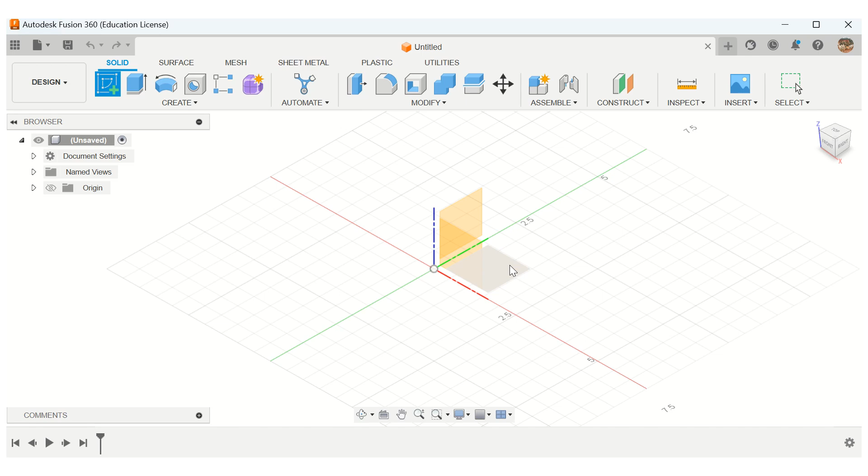Now, you do have some latitude in how you want to build your box. We have extra supplies in addition to the regular Automata kits, so I am not going to lock you down to the specific sizes of the pieces that we have. We've had people glue pieces together, and last year we had people saw pieces of it to get the design that they wanted. So I'm not going to hold you to that, but you do need to be intentional in your dimensioning.

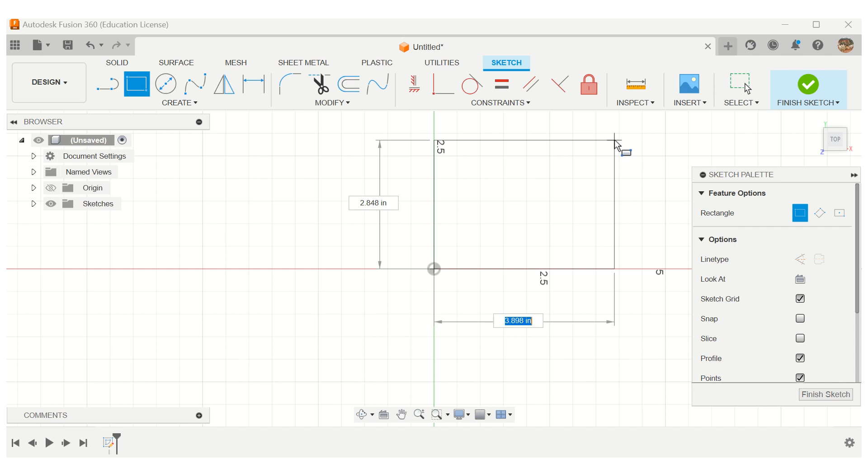So I'm going to go ahead and start by drawing a rectangle, and then I am going to dimension that rectangle. I am doing this without a mouse because my mouse is at work and I am not, so it might take me a little bit longer.

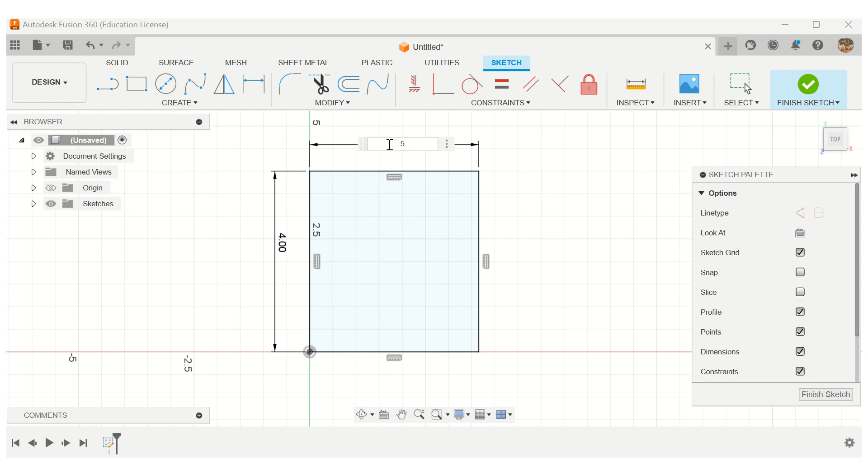The boxes that we have are, when you put them together, there's some overlap in the pieces, but they're about 4 inches by 5 inches by 4 inches, give or take some. So I'm going to make this 4 inches tall, and I'm going to make this 5 inches wide. It's not exactly that, and there's some flexibility with how you can actually put the pieces together.

Now I'm going to finish that sketch and then extrude this to 4 inches, and that's going to give me my basic box. Now, of course, the Automata box is hollow.

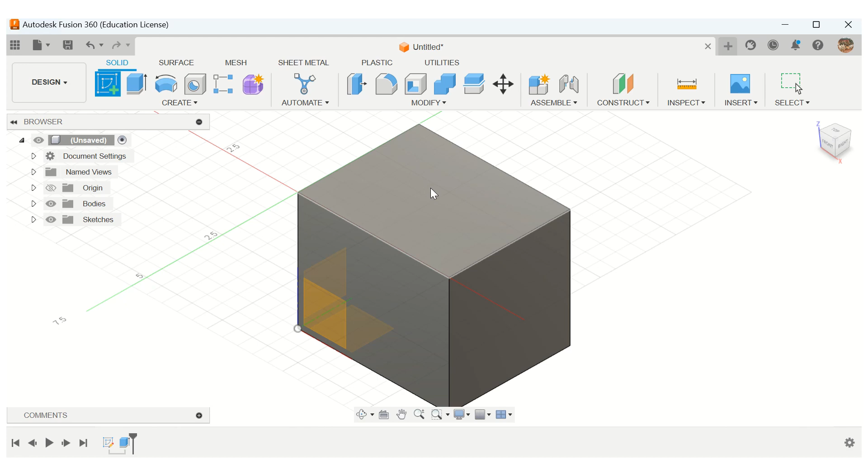So what I'm going to do is draw a sketch on this surface, which some of you have done while playing around with Fusion, and some of you have not done yet. When you go to create a sketch, you don't have to pick one of the 3 primary planes. We do to start, but once we have some planes in our design, we can draw on any of those planes. So what I'm going to do is pick this plane to draw on, and Fusion will rotate that around.

And I'm going to draw a rectangle inside. Now, here's one of the reasons why I wanted to do this particular video, to get the thicknesses correct on this. So the thicknesses of the little board pieces that we have are about 1/4 of an inch.

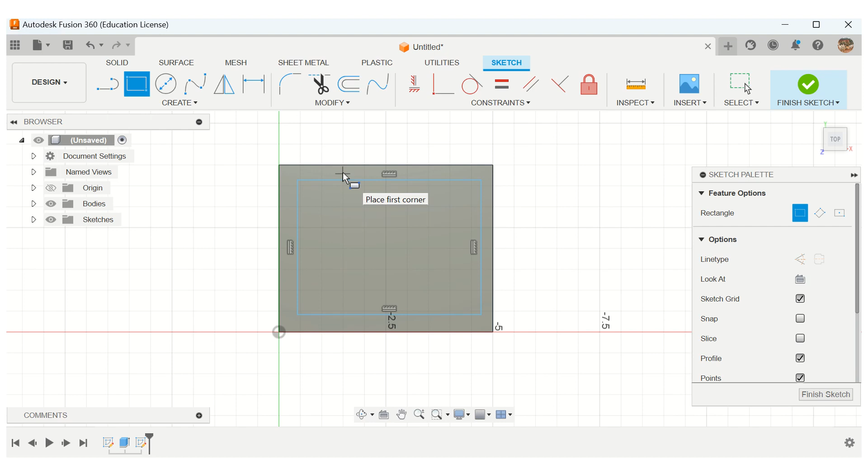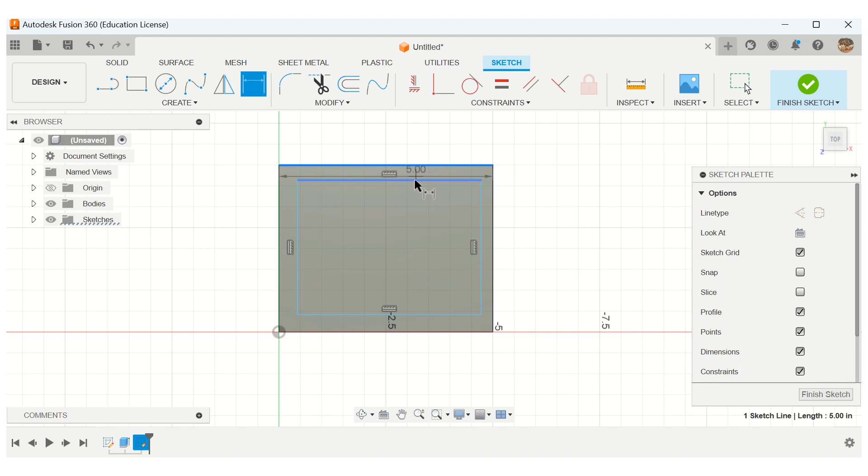So in order to dimension this, rather than dimension the rectangle and try to locate the center, I'm going to click on the top line there, and then this line right here, and dimension that to be 0.25 inches. Then I'm going to do the same thing all the way around. That's going to ensure that my cutout is what I want it to be.

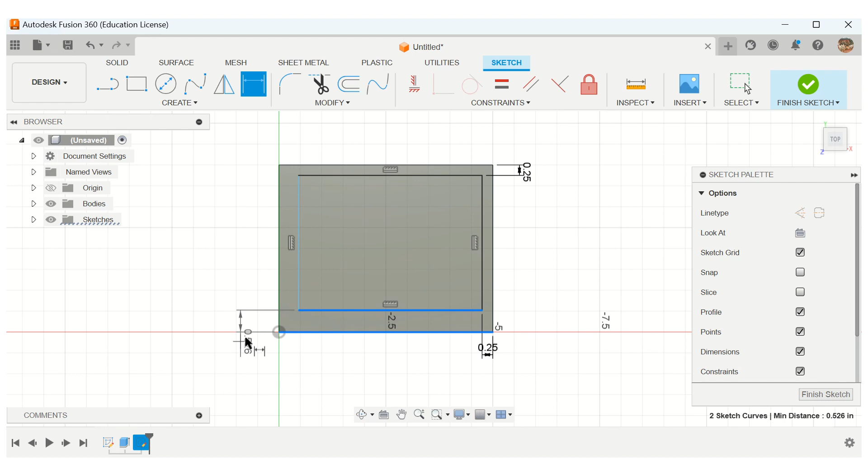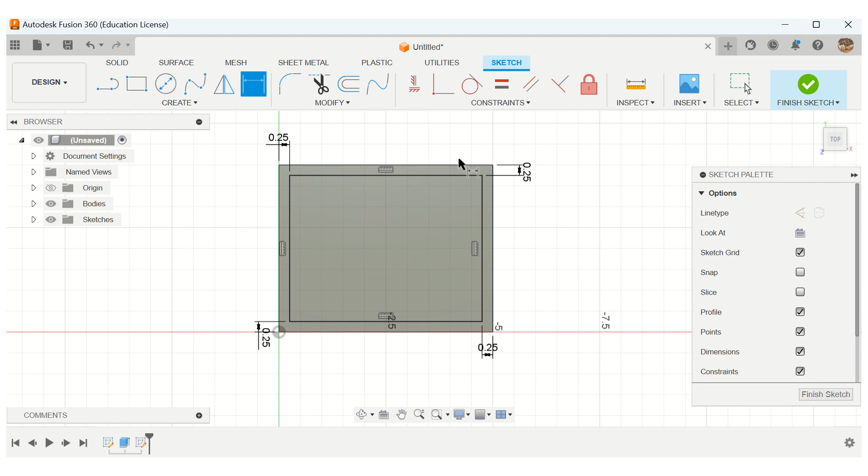Now there are other ways that you could do this. You could do a center rectangle and dimension the center from the edges, or dimension the actual rectangle itself, which I am not doing — you'll note that I'm not doing that. I'm just making sure that it is 1/4 of an inch away on every side, and then Fusion is adjusting the size of the rectangle.

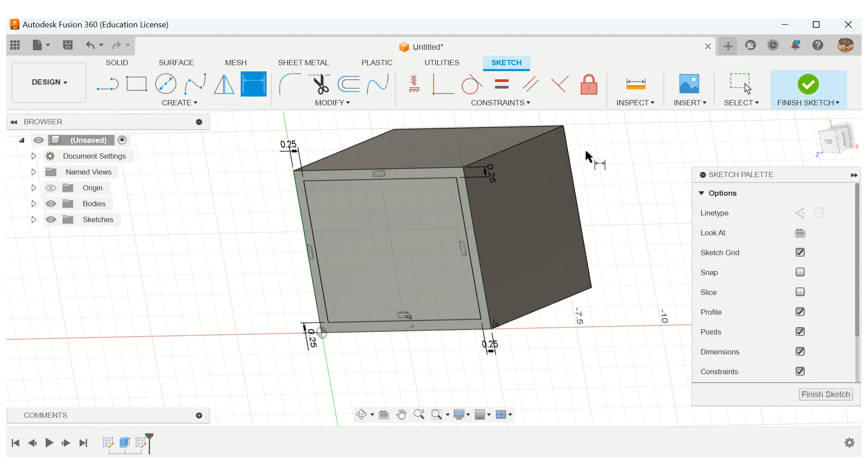So that way I'm completely sure that this perimeter I'm outlining is the size of the actual pieces that we have. Now what I'm going to do is a cut extrusion in, and if I turn this around, it is 4 inches deep. So if this back piece needs to be 1/4 of an inch thick, I'm going to extrude that 3.75 inches in.

So I'm going to go ahead and finish that sketch. Now what we have is this rectangle on this face, and I'm going to extrude that.

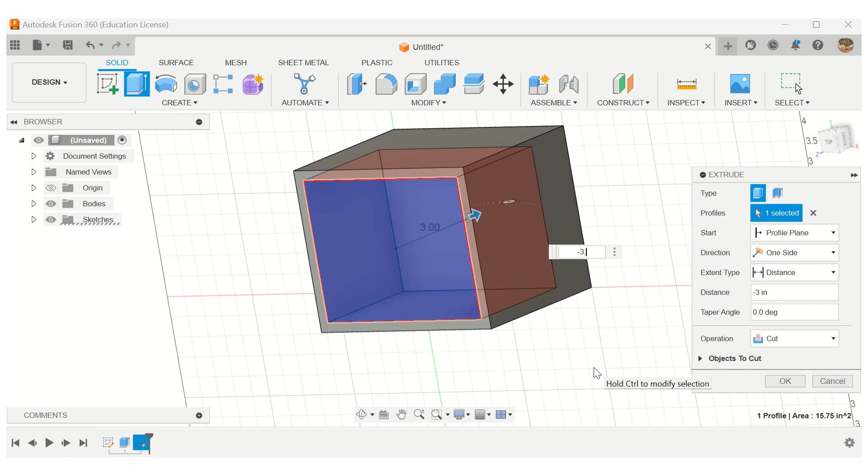Now I want to extrude in so that I'm cutting it in, but I want to make sure I have 1/4 of an inch left in the back. Notice that this is negative, so I want to make sure I'm doing a negative extrusion here. It just means I'm going in the other direction, and I want that to be 3.75. That will make sure the back here is the thickness I want it to be.

Okay, so there's my Automata box.

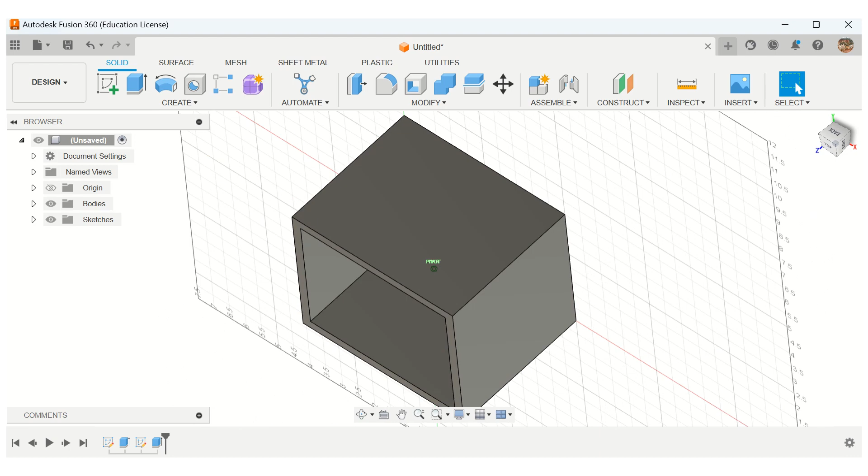Now I'm going to do a couple of things here geometry-wise, as well as introduce a couple of new skills. If I want the axle of my Automata to go straight through the center, which you probably do, because if you put it somewhere other than the center, you're going to have a lot of space on one side of your cam, which is what gives you the motion you want. But you'll run into the risk of the cam hitting the edge of the box in another direction. So what I'm going to do here is create a sketch on this side panel.

And then I'm going to use some geometry.

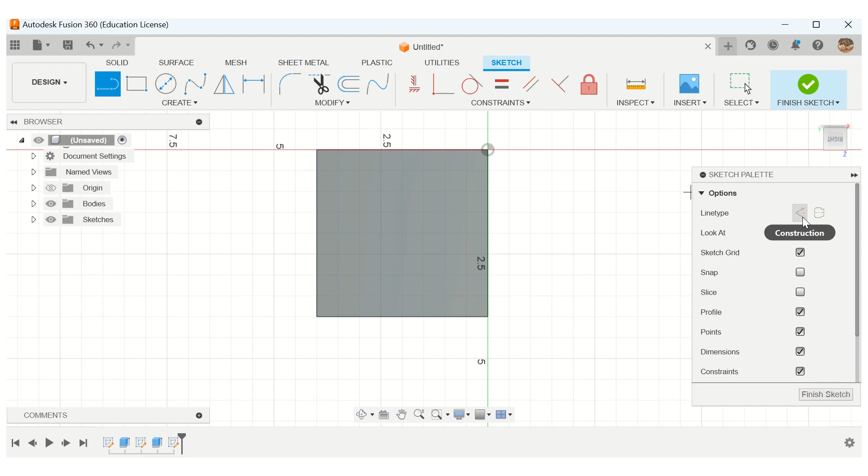So I am going to draw a line, and over here you'll notice it says line type, and there's an option for something called a construction line. We are going to cover construction lines in a future lesson, but if you can get it now, even better. This is a line that's not actually part of my drawing and sketch here, but that I am going to use. So what I'm going to do is come up here to this corner, and you'll notice that Fusion marks off that corner.

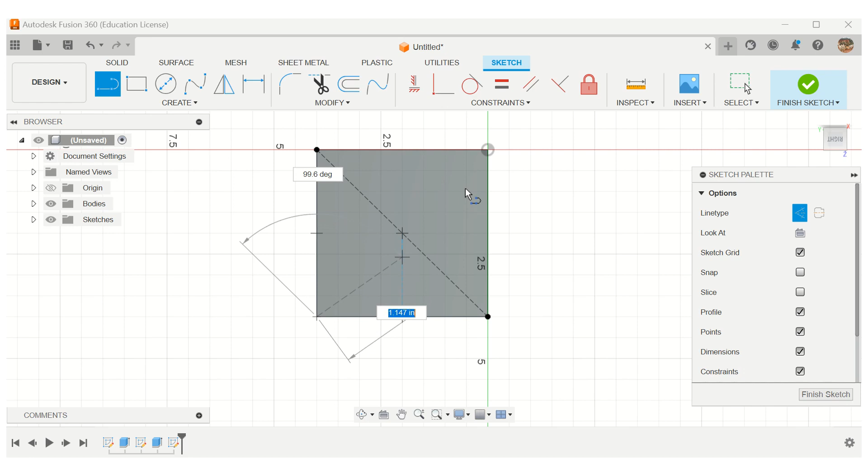I'm going to draw this line diagonally across, and you'll notice that it's dashed. That means I can see there's a line there, but Fusion is not going to recognize this line in terms of doing an extrusion or anything like that, because this is a construction line — it's intended to guide my design, but it's not necessarily part of the design. Now I am going to draw a construction line going across the other way.

And here's the geometry piece: if you have a rectangle and you want the center of the rectangle, the lines intersect at the center. So the midpoint of those lines is going to be the very center.

Now, something I always forget to do is turn off my construction line. I do it all the time — I'm sure you'll watch me do this in class, where I just keep on drawing, and then I'm like, oh, it's still in construction mode. It's super easy to change that. If you wanted to change it over, you could simply come over here to select, select the line, and then you have the option to change it from construction line to a regular line, or back to a construction line. So if you forget, it's not a big deal.

Now I am going to draw a circle, and make sure that circle is right in the center. When you do your actual automatas, this is the geometry you want to employ, because you're going to want to physically drill these holes in the center. Otherwise your axle is going to be off, and it's definitely not going to work right.

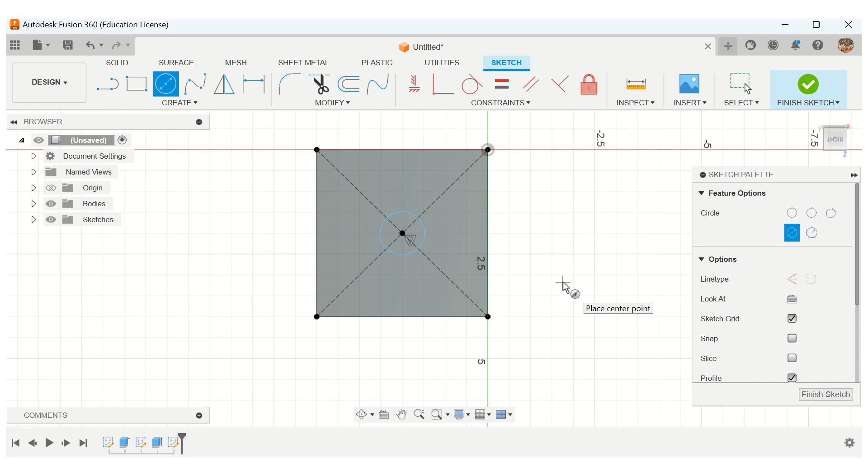And then for the dowel rods that we have — this could vary depending on what you have — but usually about 3/10 of an inch. If you use 1/4 of an inch, it's a little bit too small, so we're going to make that about 3/10 of an inch.

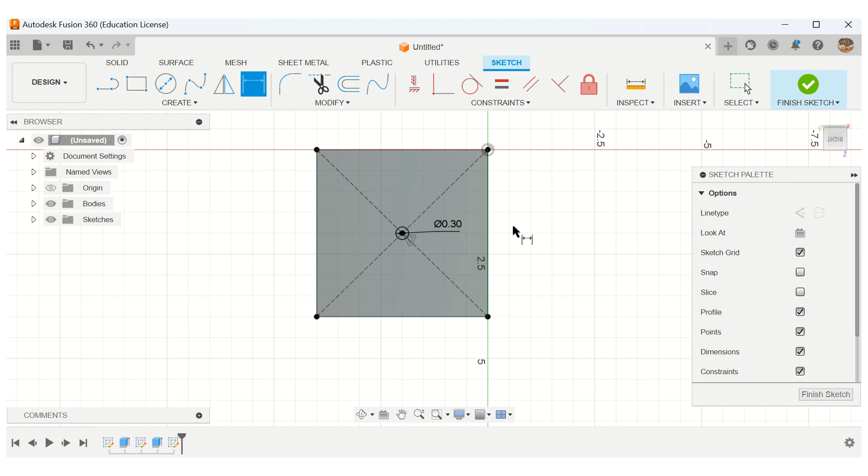And now I'm going to extrude that hole all the way through. Now, this is where I really, really wish I had a mouse.

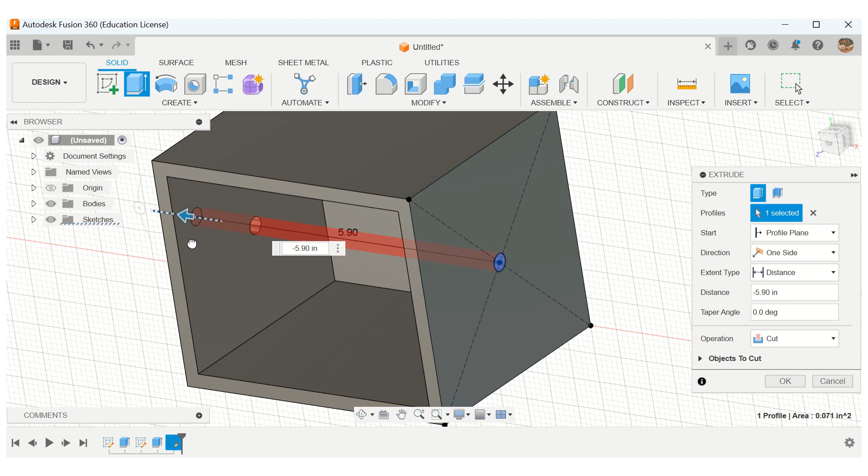I can zoom in if it's a little hard to see the piece—you'll notice what I just did, I zoomed in so I could see it better. And I'm going to take that hole and do a cut extrusion all the way through the other side, pulling it all the way through. It's only going to matter that you have it all the way through if you intend to design something else that goes out there, which we don't intend to do.

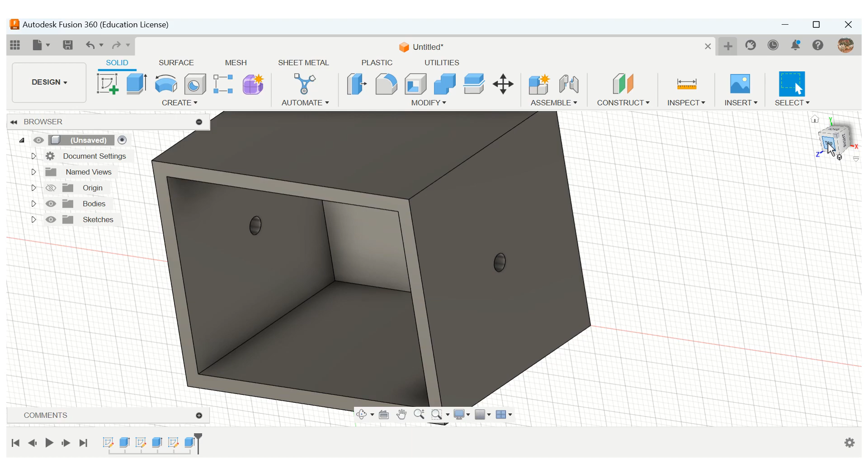You'll notice over here with the extrusion it says 'cut,' and that's just Fusion's way of telling us this is an extrusion that's cutting through the material we have. So now I have my holes, and they're beautifully lined up. There it is—you can see that goes all the way through.

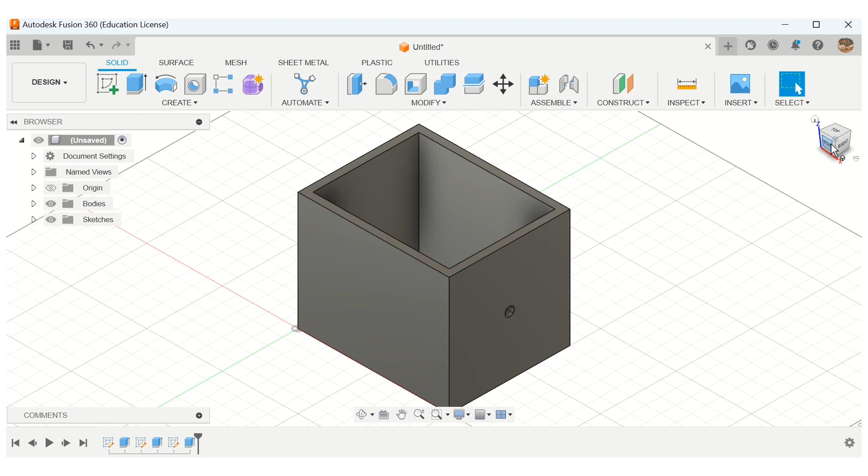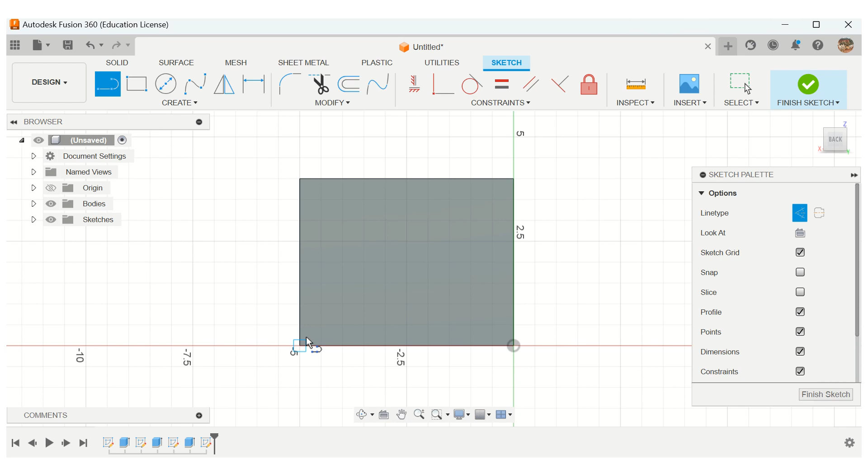Now the last thing I need to do is put some kind of configuration of holes in the top. This is really up to you what you want to do with this. I'm going to create a sketch on that top face and quickly do the same thing I did on the other one, because I do need stuff lined up. Again, with your geometry, if you don't do this, you will have some problems.

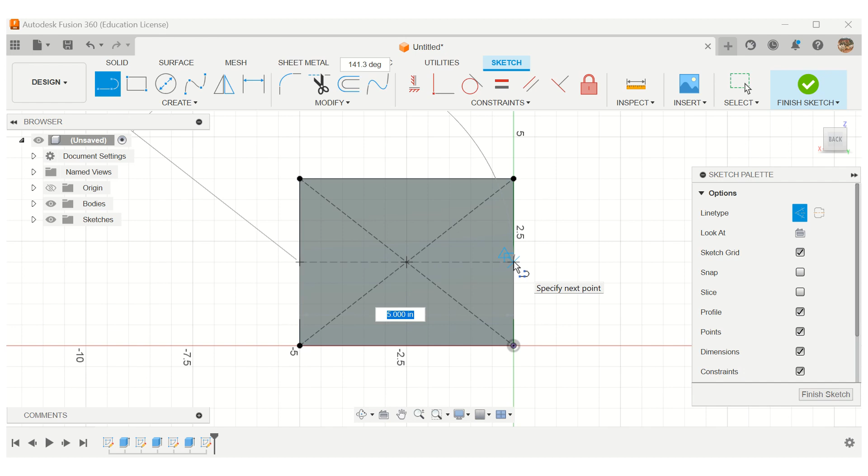Now I'm going to do one other construction here—I'm actually going to go find the midpoint over here. Notice if you look at the left hand side, as I'm moving the cursor up and down, all of a sudden you see this triangle. That lets me know I'm at the midpoint, and I'm going to draw that through to the other side. The reason I wanted to do that—and I've got to remember to turn this off—is let's say I want more than one hole.

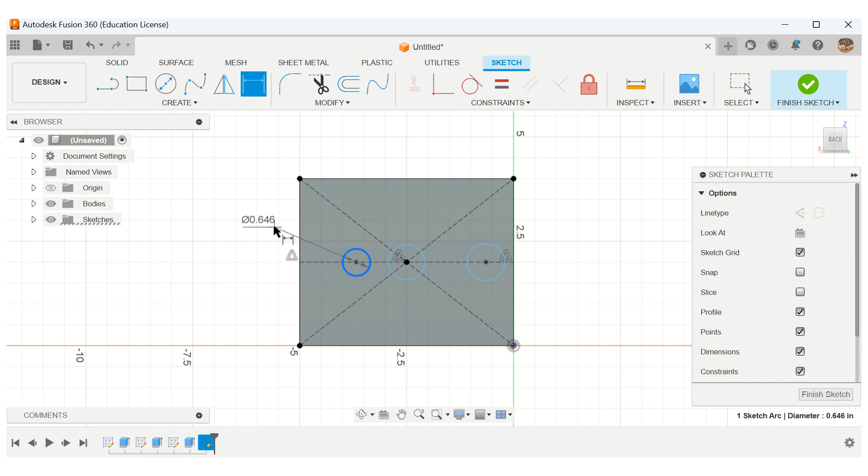So I want a hole there, and then one here, and then one way down here. Now for your actual automata, you do need to measure these out, because you'll have some stuff underneath, and these holes will often vary in size. I'm going to make all of mine 0.3, but you do not have to—we have people use all different kinds of materials here, and we'll play around with the drill bit.

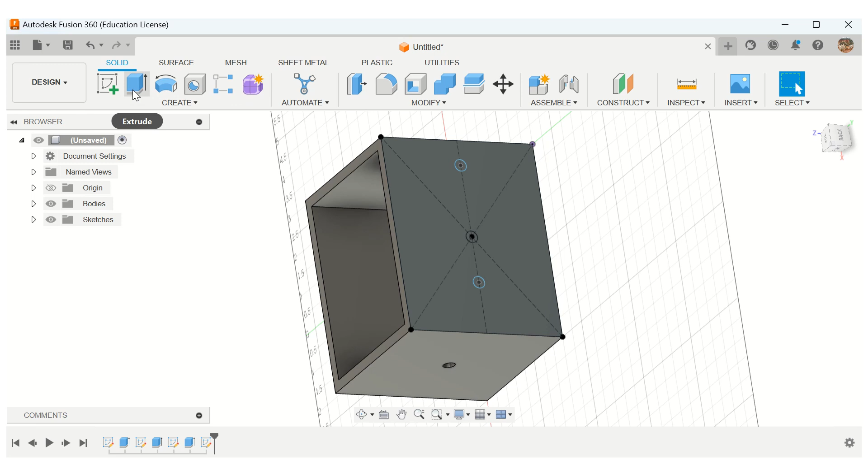Okay, so I don't know what those are, but there they are. Now, to be efficient, when I go to extrude, I'm going to choose all of them, and I want to extrude them through, but I don't want to go all the way to the bottom. You don't want to actually cut your hole through the bottom piece, so I need to make sure I stop before we get there.

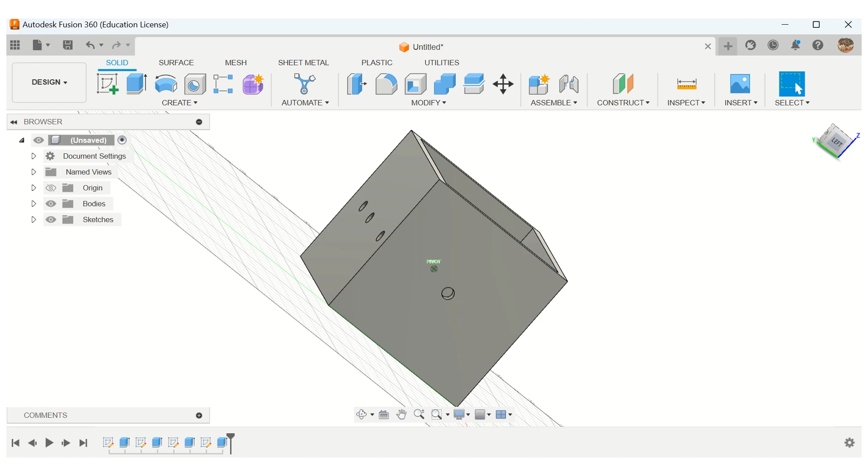And now I have my personally designed automata box. So I know that took about 12 minutes for me to do, but hopefully if you bothered to watch it, you got some tips and some geometry for how to do this a little better yourself.

Typically I do not save stuff that I'm doing—I just have a lot of cluttery stuff over the years, but I think I'm going to save this one. So I'm going to go from new drawing from design, and because I have not saved it, I will save it: Automata Box Design Demo. Hopefully I don't need to ever save that again.

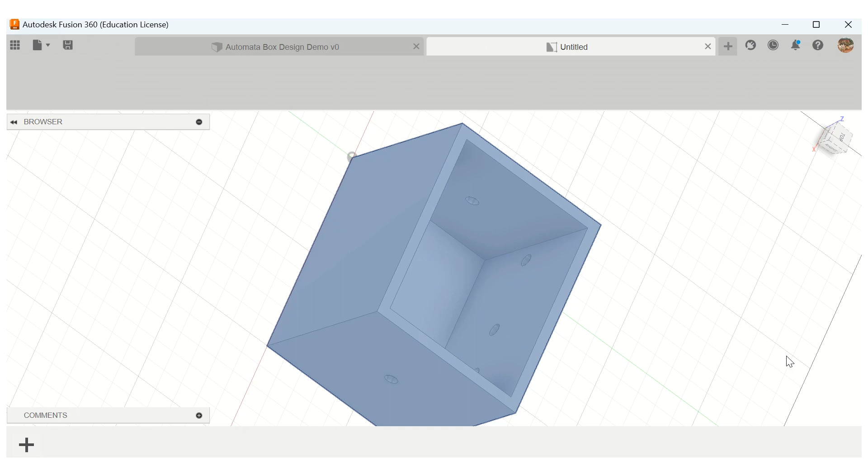This is all good—I'm going to make this 8.5 by 11, and then we'll just hang out for a second while Fusion is doing its thing. This is fun. I'd pause it, but as soon as I pause it, it will unlock, I'm sure.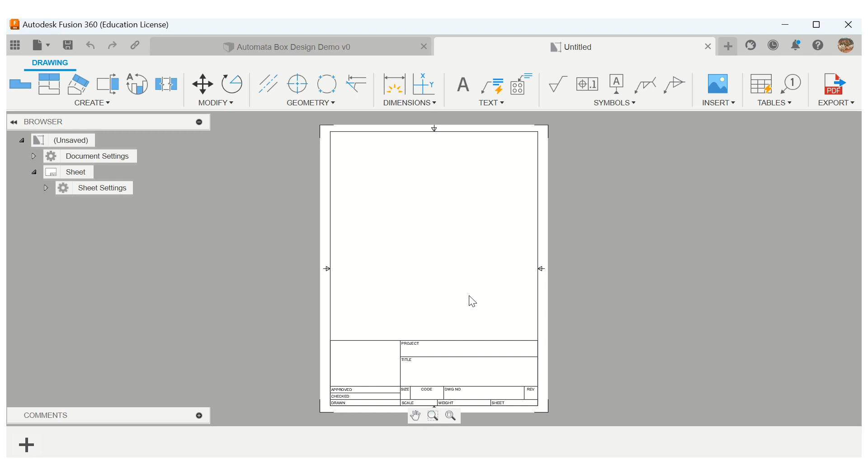There we go. Okay, I have no idea why my project is called Pen Design. Don't know why. Now, remember what we said in the previous lesson about doing these multi-views—we can't just pick whatever for the front. We need to make sure we're picking the right view, and that view is not the right view.

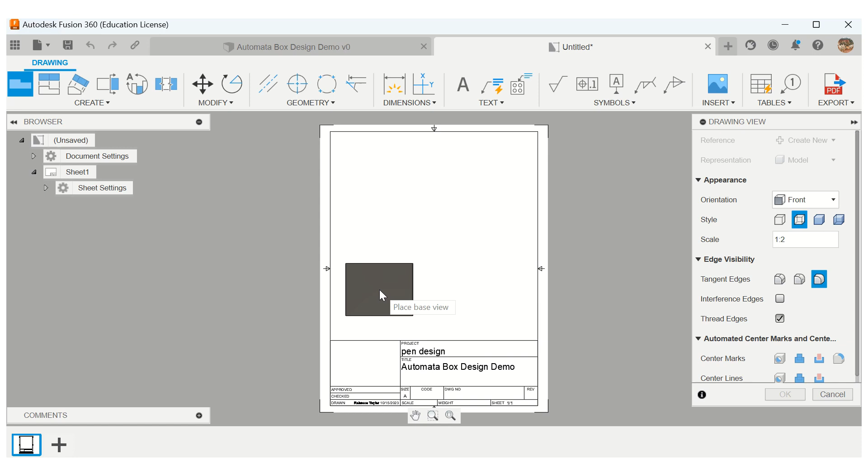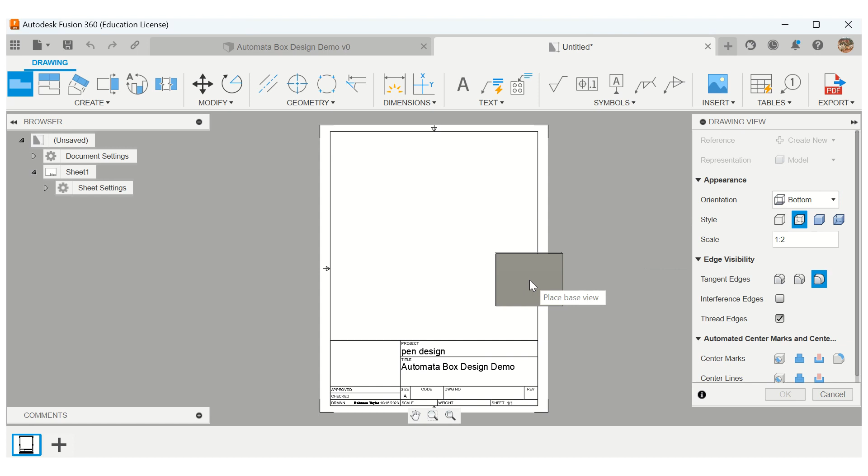So I'm going to come over here, and last time top checked out for me, so yeah, that looks good. However, I'm not 100% sure it's not upside down. I'm going to go look at the right side. Let me see the bottom. Okay.

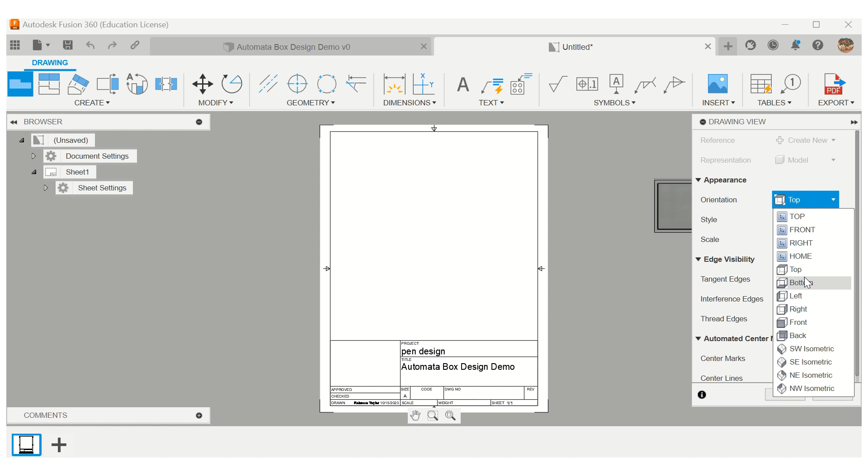I just want to make sure that when I go to do the top view that I'm going to see the holes in the top view. I want to see back. Okay. All right. I don't know if we're going to be okay or not. Okay, so I'm going to drop that. And I think I like the sizing on that. It actually feels a little bit big.

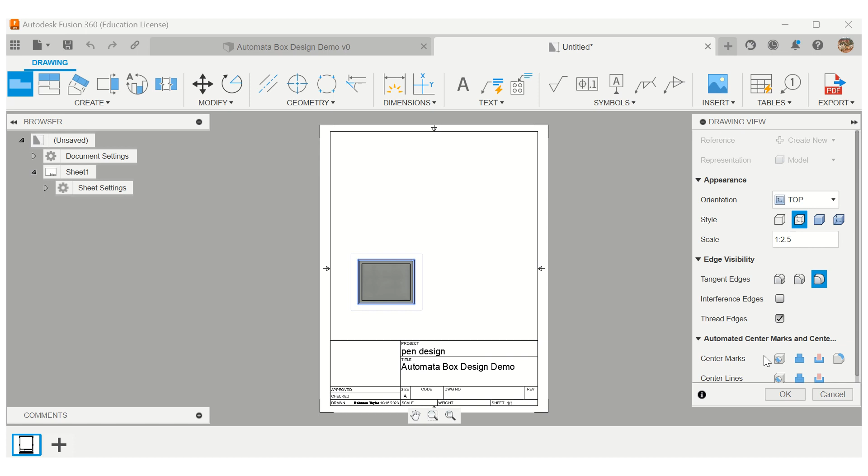I'm going to say 1 to 2.5. Yeah, okay, I think I like 1 to 2.5 a little bit better. And, oh, good. You can see where those hidden lines are. So we still have some hidden lines there for the different holes. And now I'll do projected view. I will select the parent view, and now it'll drop my front, my isometric, and my right view. Click the little check mark.

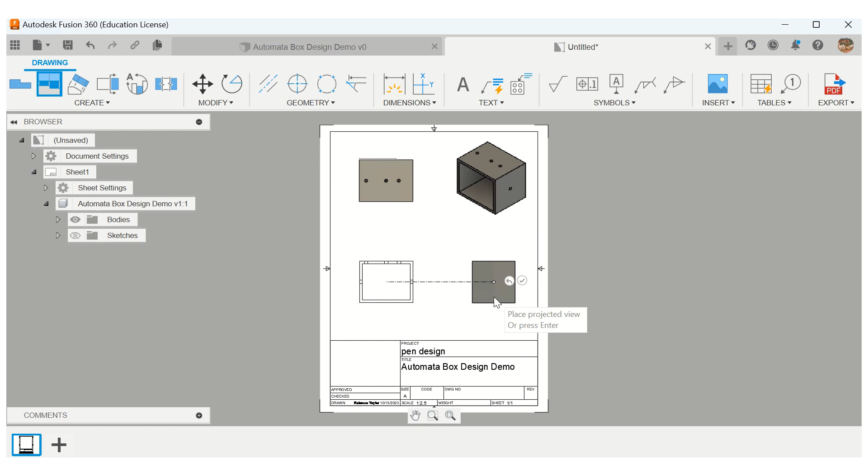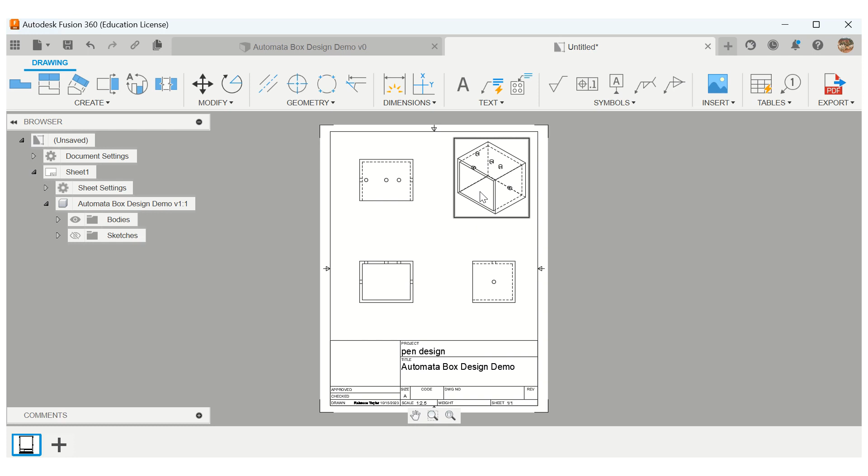Okay, so your task at this point is to create a fully dimensioned multi-view. Now, there's one dimension on here that we actually can't get on this view. I'm going to go ahead and make my isometric solid. The part dimension I'm talking about is the thickness of that back wall. There is no way for us to dimension it. You can see the thickness of the back wall in two places. You can see it right...

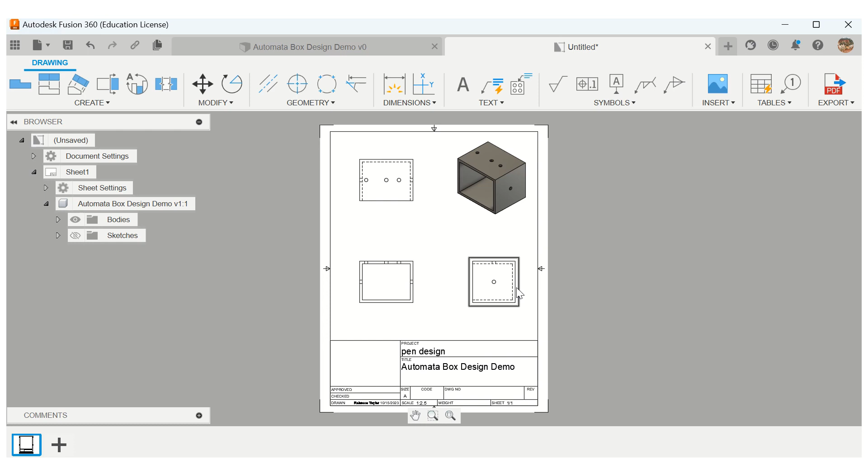Okay, that's backwards from what I thought it would be. Right here. And you can also see it right there. However, you can't dimension it on those views because you'd be dimensioning to a hidden line. And this is the view where you can see the back wall, but you can't dimension it because the dimensions are not there. So we have a problem with that.

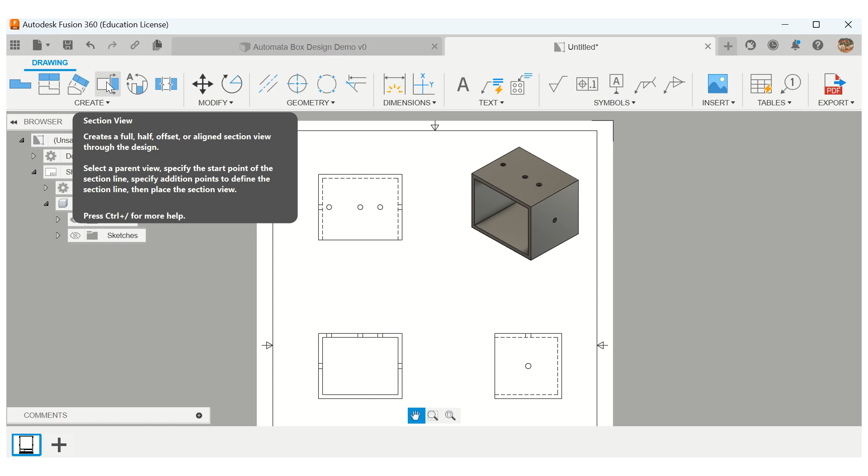Now, the way we're going to solve this is by annotating it. We're going to measure it in one spot and then make an annotation, which is a note, on the screen. If it was something that we couldn't annotate, like let's say the back wall was thicker and we can't cover it in "all sides have a thickness of," you would have to do a section view, which is up here where my mouse is hovering. It's a section view where we would slice the object in the middle and be able to see it from the side. And if I feel inspired later, I'll go ahead and do that.

Okay, so let's go ahead and get all these dimensions on here. I'm going to dimension the height. There's my height. I'm going to put the width up here, as well as this dimension over here. There's a method to my madness here. Okay, so those are the basic dimensions. Now you might drill your holes different diameters. Each hole needs to be dimensioned on the view where you can see the hole.

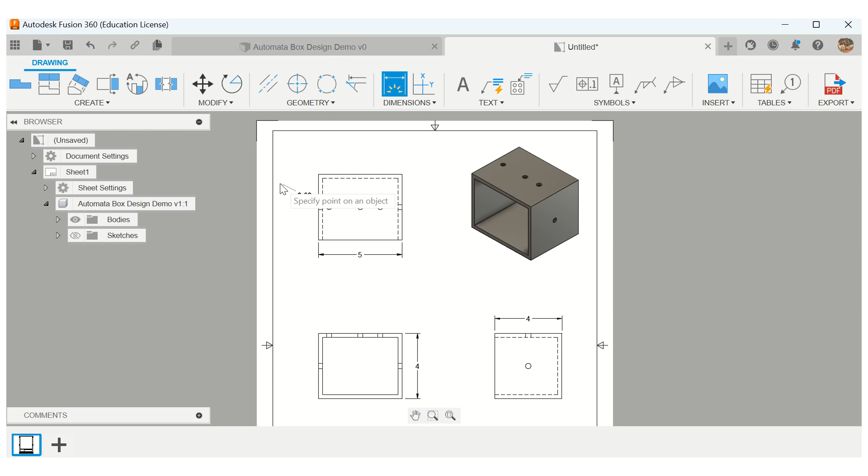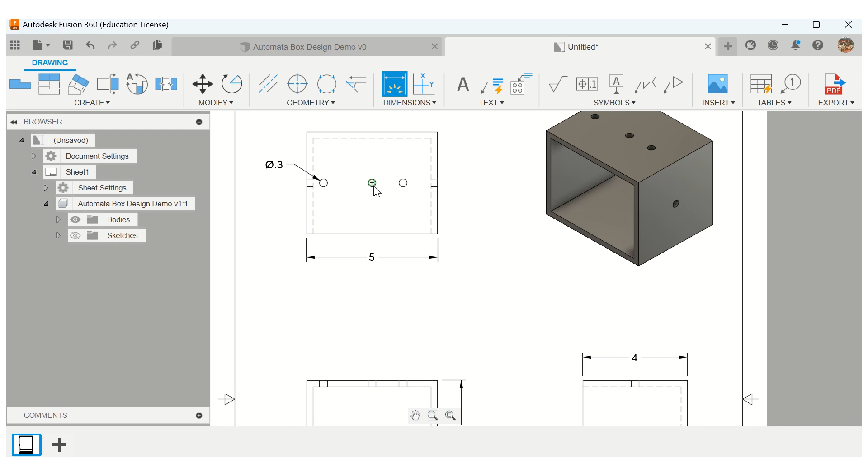And that did not work. Escape. Okay, so the dimensioning tool did not pick up the hole. There it is. Now, I know I'm placing that in the margin, because there's really not a better place for me to put it. And I'm zooming in because my mouse is not picking this up. Okay, so there are the hole dimensions.

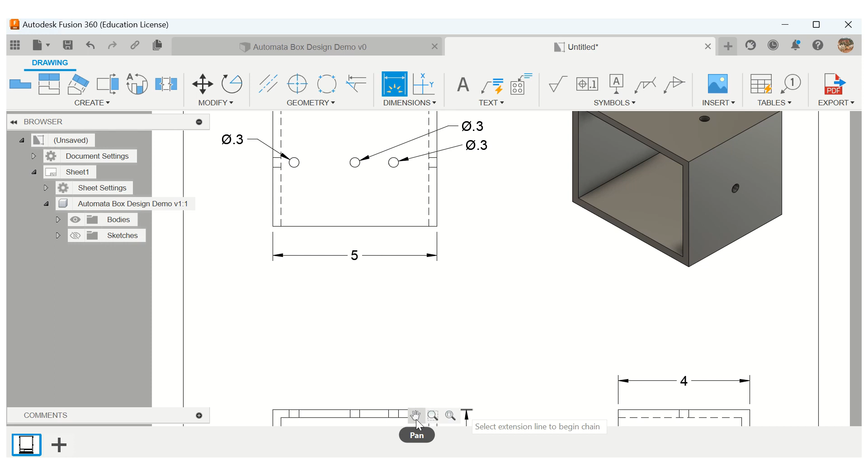And then I will come down here and grab this hole dimension. There's a better way to do this; this would be better to do with an annotation as well. Good grief. I don't know what it is picking up.

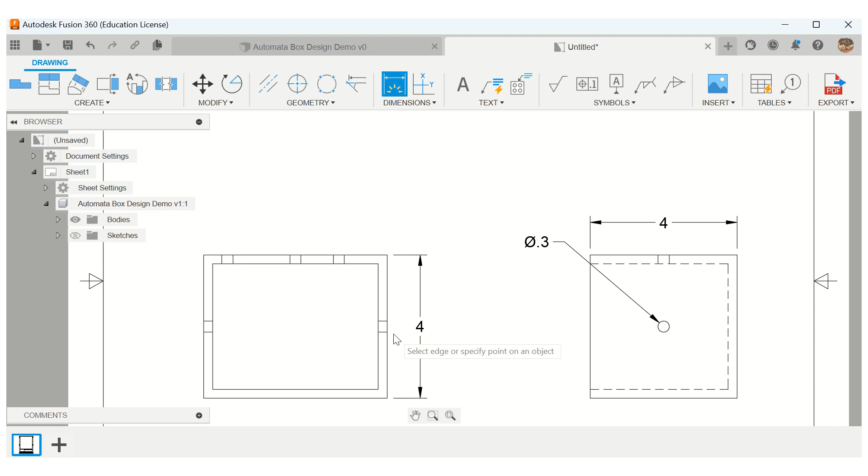Okay, now we have to do those hole dimensions there. We cannot do them here because even though these look like solid lines, they are actually hidden lines. They look like solid object lines, but if you look at the length of the hidden line there, that's about the length of what we're seeing, so it's just too small for it to dash the lines. I know that's probably a little bit confusing. And now I have like a random thing.

I have like a random dimension there. We're gonna escape out of that. That's not where we needed to go. Now, what I'm gonna do is I'm going to do one dimension on this view. I am going to dimension from there to there. So I clicked the bottom and the top. Rewind it if you need to, okay. And what it's doing is it's showing you these two arrows and it's pointing to that and saying that is 1/4 of an inch thick.

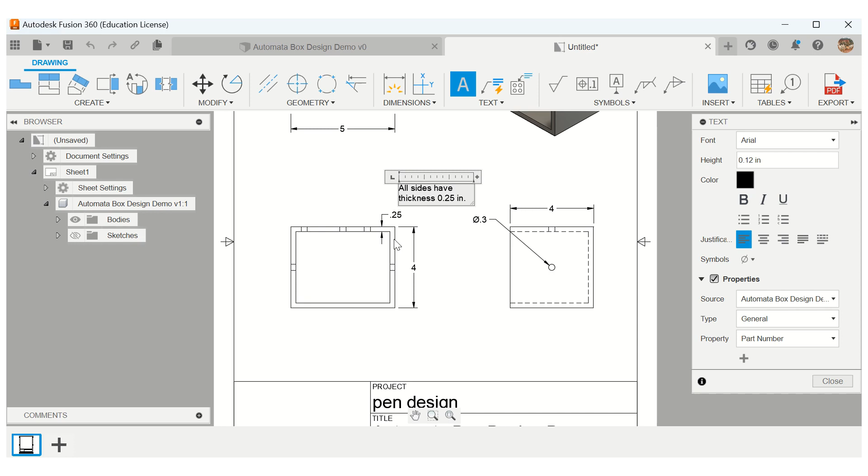Okay. So now over here where it says text, we are going to create a note. We don't want a whole note. We want just text. And next to that, I am going to annotate. So specify the opposite corner. And in here, I'm going to type all sides have thickness 0.25 inches. And that is my annotation. So instead of trying to go around and find it everywhere, I am just going to measure it once and then put this note on there that says all sides have a thickness of.

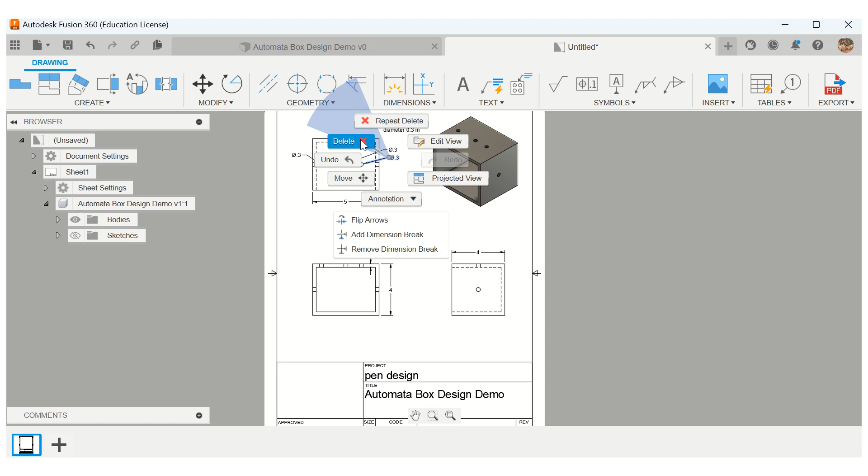Now for my design specifically, because all of my holes were the same size, it probably would have been better for me to have measured one of them and then done this. All holes have diameter 0.3 inches. Okay, and then actually delete these extra measurements. And then maybe I'll click that one and move it a little bit closer. So that's actually a cleaner way of doing it. Oh, I still have one over here. So I can go and delete that.

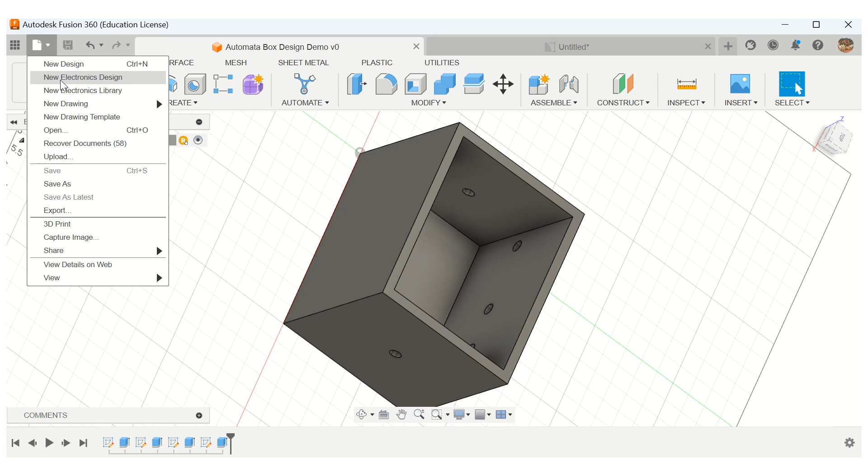And so there is my fully dimensioned Automata box. I've adhered to all the rules and I've used these annotations to help clean it up. Okay, so yay. Now, if that's all you want, that's enough for you to get your 100 on your assignment. So that was a whopping 23 minutes from start to finish. If you are interested though, I am going to do one more thing just for fun. So I'm going to come back over here and we're going to do new drawing from the design one more time.

And what you're hearing is my cat just jumped up here. He's not very good at this. He's never taken a single math class and he doesn't understand anything about geometry, but he likes to think that he's helping.

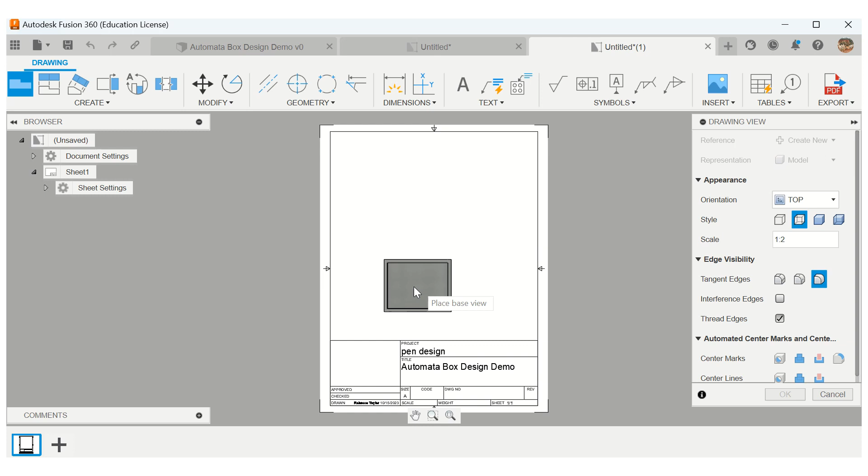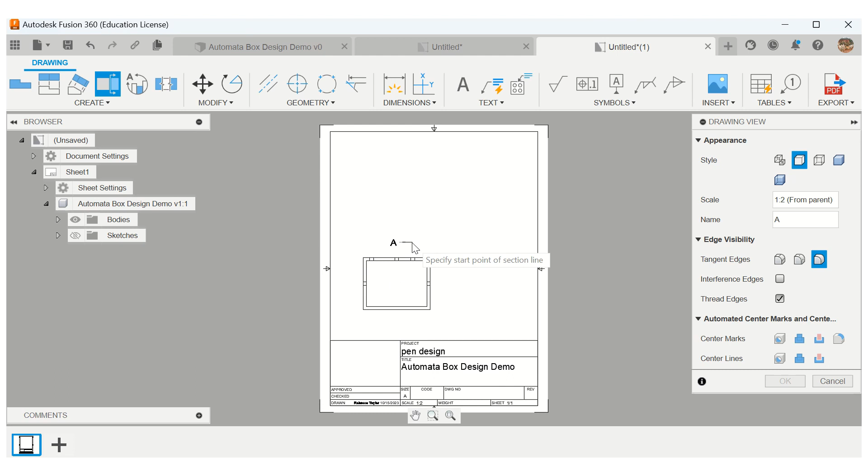Okay, so we're gonna go and get that view. So this time, instead of placing the other views, I am going to do a section view. I clicked section view here, and I am going to click my parent view, and then I'm going to click here, and then down here, and we are going to cut in. And what that does is it actually slices through the box, and what we are now seeing is the right side.

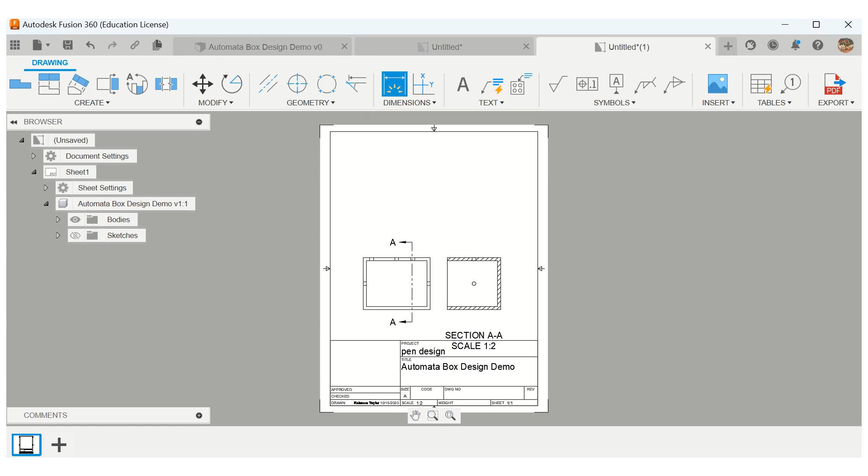But see all these hash marks in here? That is like we're cutting right through the solid material. So it's like we took a saw and we went right down here and then looked at it from the side. And so I guess that's not the right side. That's the left side we're actually seeing. We're seeing through there. Now, when you do that, you can then dimension the thickness of this back. Okay.

And so this, I have absolutely no idea what I've done there. I am going to delete that. These things had yellow exclamation points anyway. Okay, let's try that one more time. So now I can dimension that thickness in the back there. And you would want to do that if you had not the same thickness.

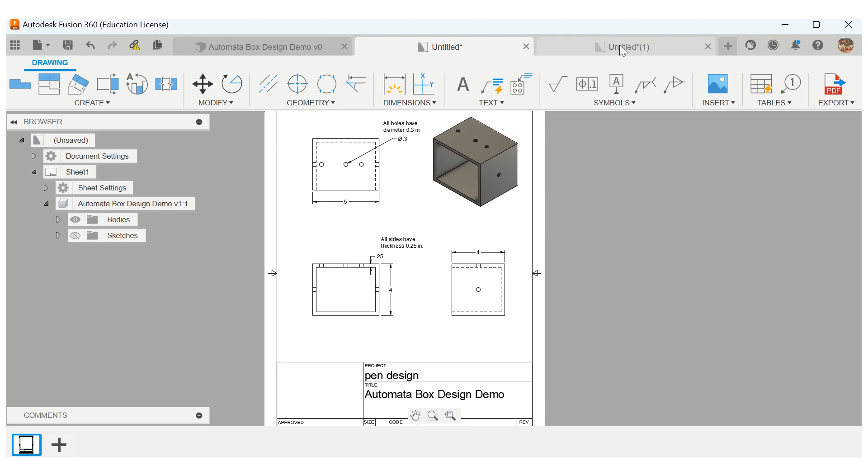So in our last drawing, we were able to get around that by saying all sides have a thickness of, but let's say they didn't, and we needed to actually give different dimensions. This is how we would do it. We would slice the drawing and look at the piece that we needed to dimension, and we would dimension that way. So that took an extra 2.5 minutes. I hope you stayed and watched all of it, and that you are now 100% prepared for doing your Automata multi-view drawing completely dimensioned using all these crazy new skills.